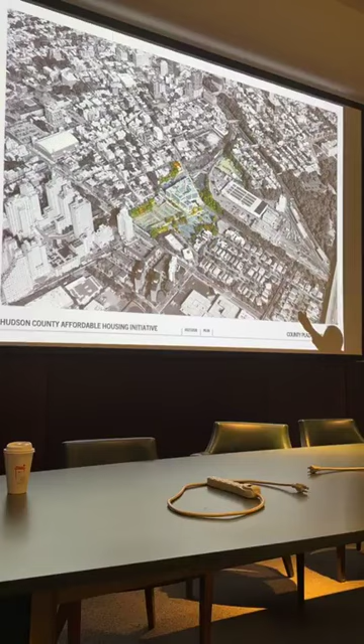And here we are - there's the beautiful picture our friends at Studio V put together where County Plaza is colored in. That's the land we're looking at, owned by the county and the Hudson County Improvement Authority. You can see the surrounding neighborhood - we've got all the residences to the east of County Plaza that some people call the Colony, and we've got the Beacon to the south, and so on.

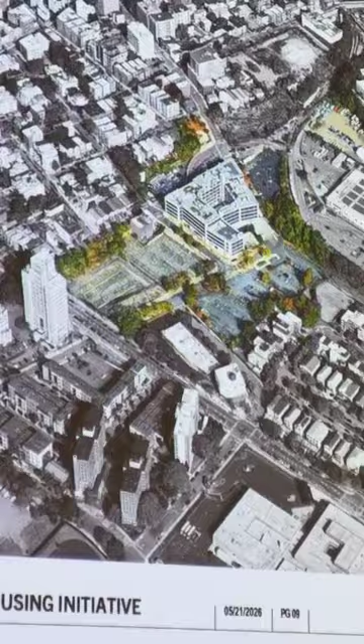Here's another map of it. You can see a lot of it is surface parking, and that is something we do have to deal with.

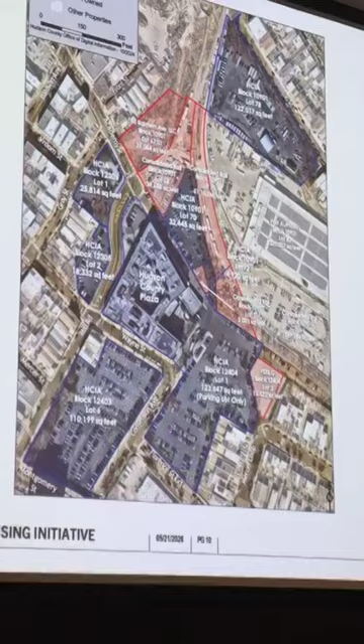This building isn't going anywhere. This building is an important building. We have about 1,000 employees that work inside of County Plaza, and they park in these parking lots that surround this building. They do a lot of important functions for the county, ranging from working on food stamps, welfare, Medicaid, the Board of Elections, the Department of Public Works, and so on.

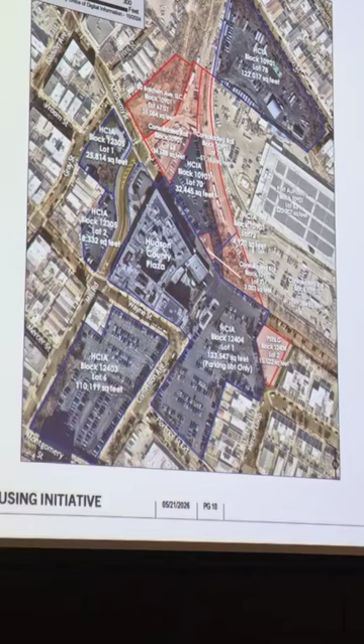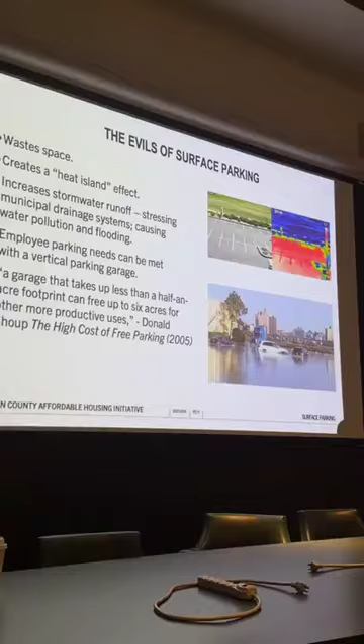The idea is that we don't need to have everyone who's parking here spread out like that. Really, surface parking is not a good use of land. Surface parking creates a lot of problems. It creates flooding, it creates a heat island effect that raises temperatures, and we know, as of yesterday and the day before, what that could be like.

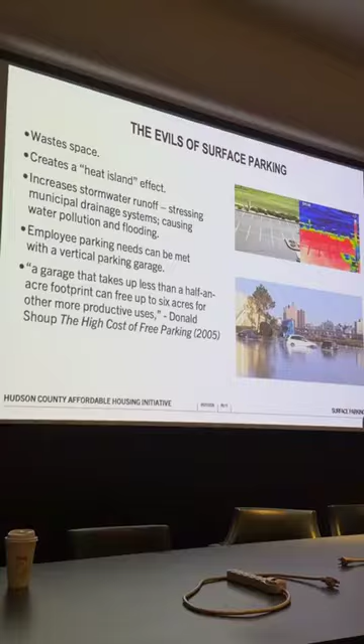So we can provide parking for the employees here on a fraction of the land by building something vertical for them, and at the same time dedicate so much other land to more productive uses like housing and green space. And one of the reasons we believe it's important to have mixed income here is multifold.

One is that when you have market rate rents mixed in with capped affordable housing, it provides you with the revenue to pay off the debt that it's going to cost to build these buildings. It's going to cost a lot of money. It's going to provide us with the adequate revenue to provide top service management for it.

When you have mixed income, you tend to provide for safer communities. You tend to draw in better amenities. And in the past, we've seen that when you've segregated people by income and tried to concentrate poverty into one building, it's a failure.

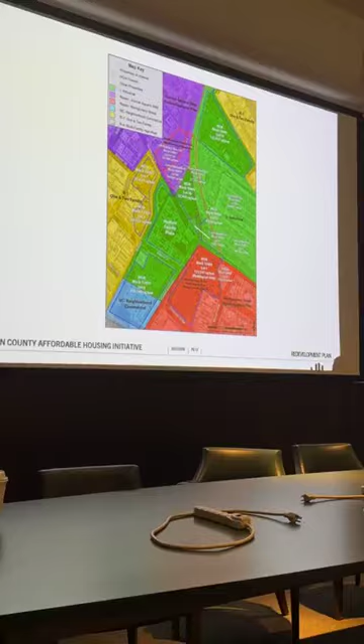One of the things we need to do in order to develop these parking lots into more productive uses is to change the zoning. This picture here shows you County Plaza, and all these colors indicate the type of zoning that governs. It's a mishmash of antiquated zoning that governs this area now. Some of it's industrial—there's not a lot of industrial building going on right now in this neighborhood.

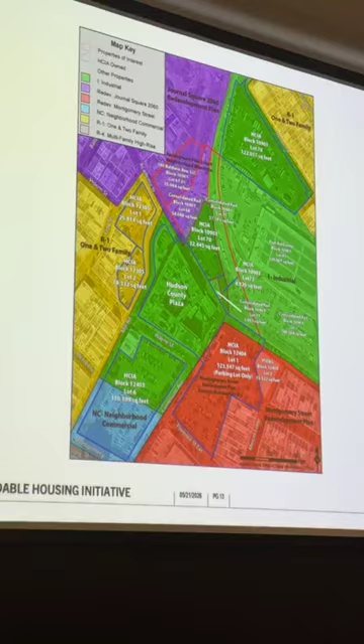Part of it over here is the Montgomery Street redevelopment plan that calls for 5-story buildings. We think that's antiquated. We think something more robust here preliminarily. But that's a redevelopment plan that was promulgated 50 years ago and by its own terms expired.

The Jersey City government agrees. In 2021, they promulgated a master plan for the city, and they identified this land as a piece of land that needs to be redeveloped and that should have a redevelopment plan. Because it's very obvious, I think, to anyone that when you look at this land, we could do something better than what we're doing with it right now.

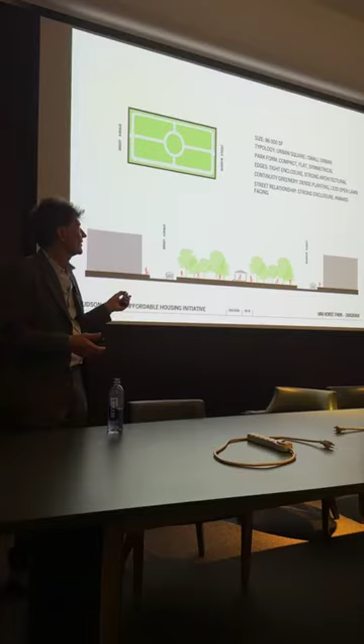For example, Van Vorst Park — this is the historic plan. We looked at what were some of the things in there. Why is that a nice place? How does it create greenery? What is the sense of enclosure? And how does it become a special place within a community? These are just examples, and I'll show you in a minute how they could apply.

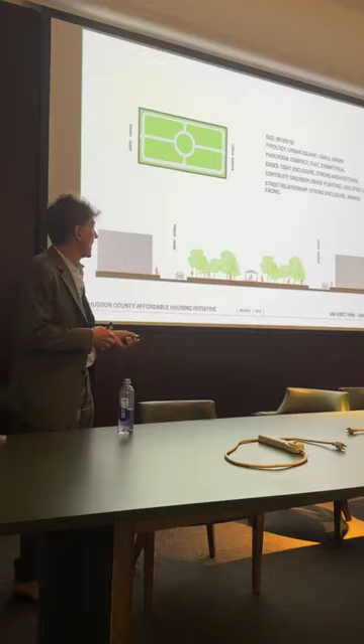Just as there's a plaza outside here, we were thinking maybe we could create one or two green squares that become a focal point. Because, as Bill said, we're not just trying to create housing — housing is the goal, but we want to create a community, a neighborhood. We need things that will actually create a sense of place within it.

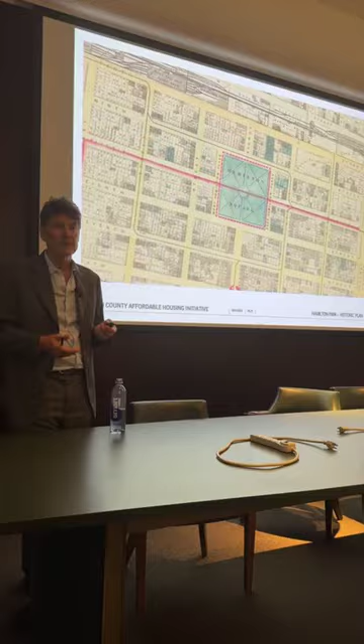Here's another one, Hamilton Park — you guys know this, another neighborhood here in Jersey City. It's different from this neighborhood, but it has this beautiful open green area, a central lawn and trees, some playgrounds and different components. So again, this becomes the center of a community.

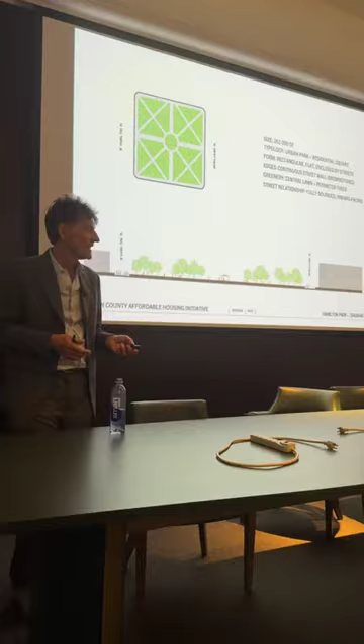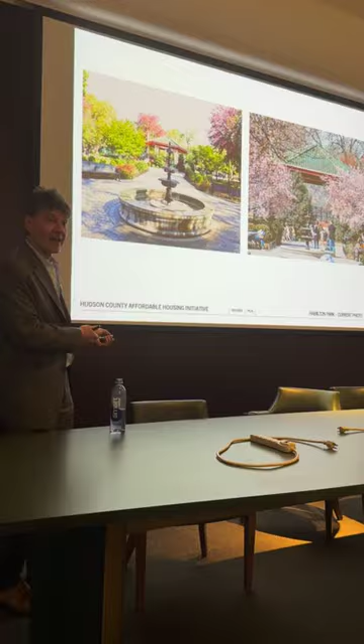We started looking at these — historic photos of it, as well as pictures of what it looks like today. It has different features. Later on, we're going to ask you what kind of features you'd like in residential buildings, retail, and open space, because we can start planning those things into the design we're just starting to work on. These are other examples.

This is Cira Green — a little unusual, but we asked, can you create open space on top of parking? Because we have a parking garage and a parking lot here, and we'll have to replace cars since people are still parking here. So we'll probably create garages wrapped with housing, put them below grade or wrapped with buildings so they're interior. But it's also possible to create beautiful open spaces integrated with infrastructure like parking.

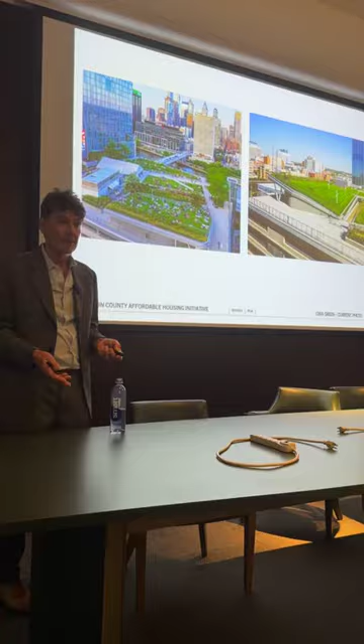So these are just some different examples. I thought this one was very pretty — it took advantage of grade changes.

It took advantage of putting the parking below. So this could be another solution.

You probably know our sites, you can see them right out there, very sloped. There's a lot of topography here. So you could have an area where you put parking below at one level, and then the neighborhood comes in a little bit higher. For example, where you have Mercer and Florence, they come in at two different elevations, like 20 feet, almost a two-story difference between the two. Or Montgomery, there are places where Cornelison goes under it, so there's a difference in elevation there. That's just part of what this neighborhood is like.

So we could actually kind of fold parking in underneath green space or wrapped around by housing. That's why we show some of these examples. I'm just going to show you some initial thoughts, and these are very, very early.

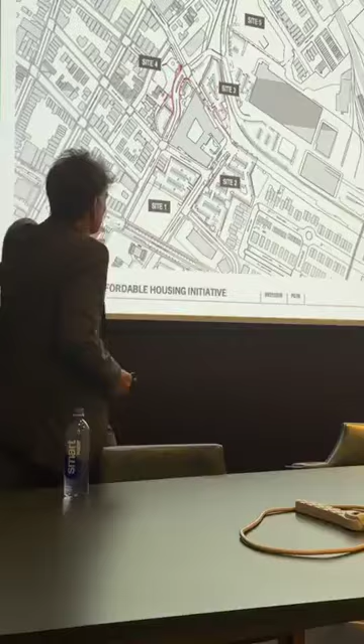But first, these are the sites, and the sites are all different. As Bill said, we're in the County Plaza building, so it's very convenient because we can actually feel right where we are. You guys know it's right here. It has this little plaza, so we're right in this space to kind of highlight it for you guys. And then these are the sites around it.

So to the south is Site 1, and that's the parking lot. That's over to the side, and that goes all the way over to Montgomery. That's like this huge parking lot that extends right to Montgomery. So it's a big surface lot.

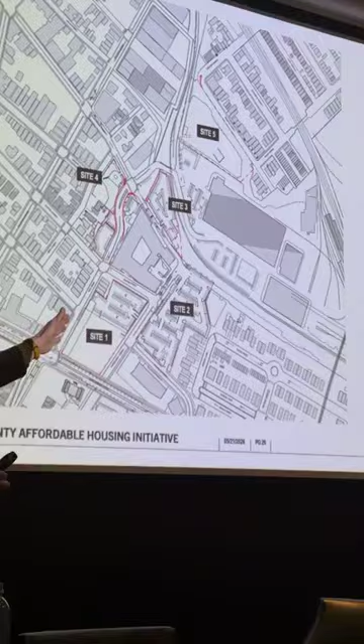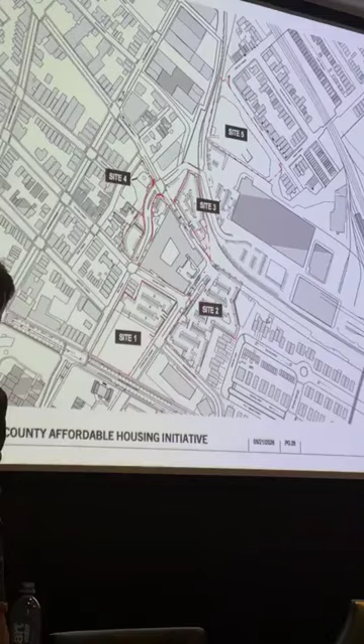Then you have Site 2, which is right across the street from us over here. This is also another parking lot, you can see it right there. There's a smaller kind of triangular Site 3. There's a little tighter site on the back, that's kind of up on the hill. There's a little park there, that's where the Palisades comes through, so there's a green area and a park there.

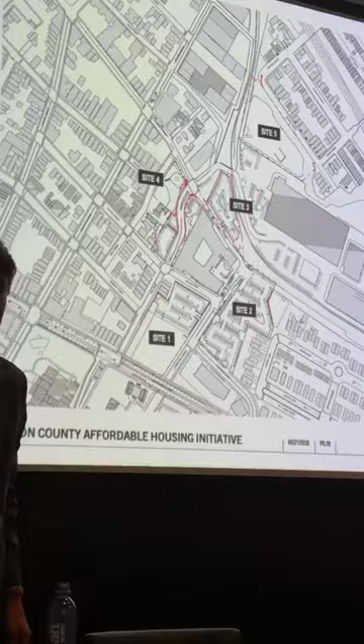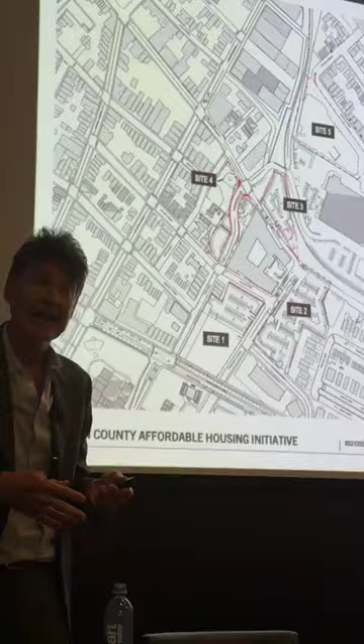And then one of the sites that's the hardest to figure out, I'll show it to you in 3D, is Site 5. That's up by that community some folks call the Island, where you have the trains from the PATH. It's kind of an industrial site, which is a little bit hard to get to, but the county owns that too. So we're trying to figure out, could we incorporate that into it, and could we create something there? That's also built into the hillside, like the hill comes up on top of it.

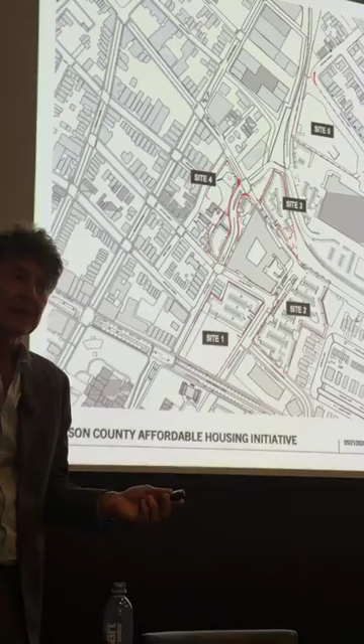So these are the 5 sites, and it's complicated. They all surround this building we're in. So we're thinking, how can we create a sense of place? I'm going to go back to those parks and images. And how can we create the housing, and how do we create the right scale of housing?

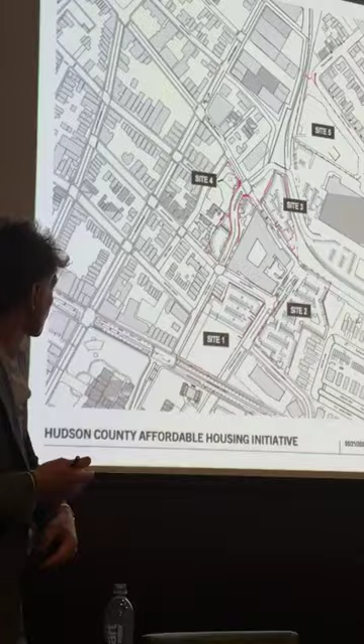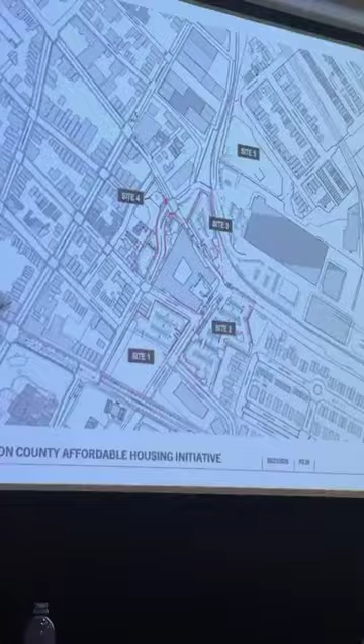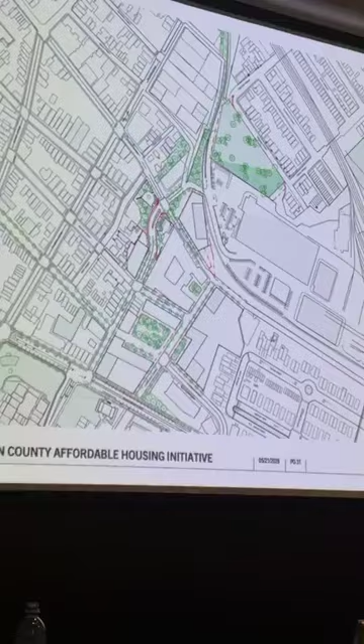Oops, let's see. Oh, and that's not, yep, oh, you got there. It just jumped ahead. Okay, so let me go back. I guess it's kind of lagging a little bit. Okay, all right, maybe I'll advance it manually, yeah, it looks like it's lagging. Better. Okay, let's see if I can get this to go.

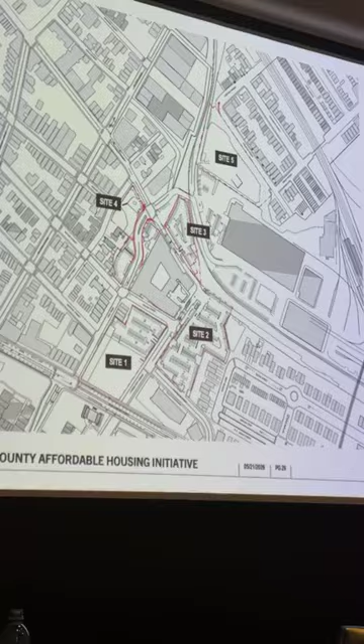So these are the sites. It's not moving? There, for some reason it's kind of jumping and lagging, but let me try to take you through it. So this is the first option, okay?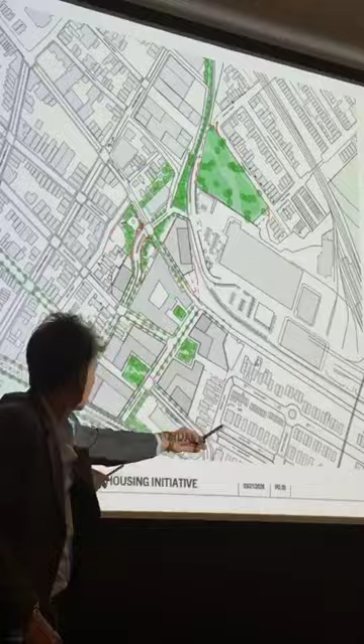In the first option, now you can start to see when I talk about these squares, it seems very abstract. But you can see down here, we thought, well, maybe where you have Mercer coming down, and Florence on the other side, this is the parking lot, but maybe we could create a little square there. So it extends with Mercer on this left side, like this, and then Florence is over here. There's a grade change here, like I was saying, and this could be one of our little town squares. So this is one example.

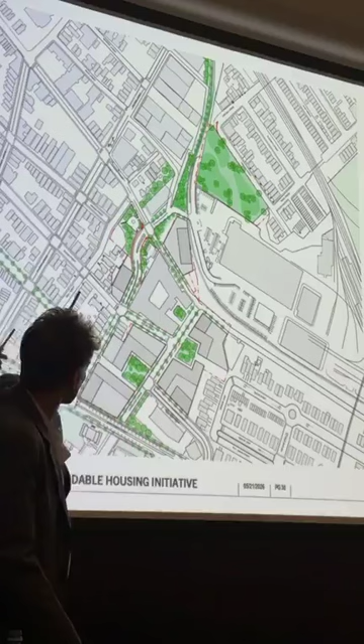We showed a second one over here at Wayne Street. That comes along the edge of the county building, and it ties into Wayne Street down here. It's a pedestrian link because the street doesn't extend there. So that could be a second green square.

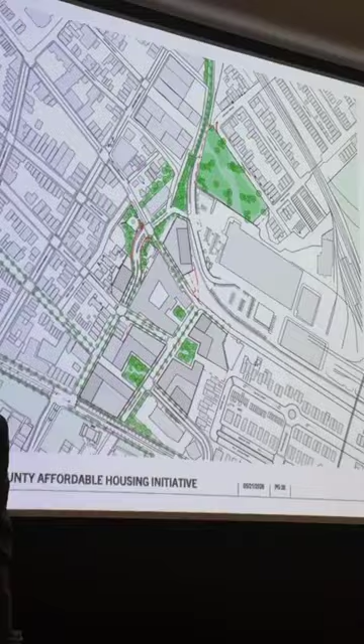And then the third one is really the plaza right here, which is that space right outside. But maybe we could open it up or take that fountain that maybe isn't being used, and create some way to kind of activate it. So these become three little green spaces, three kind of public spaces, open spaces for everybody.

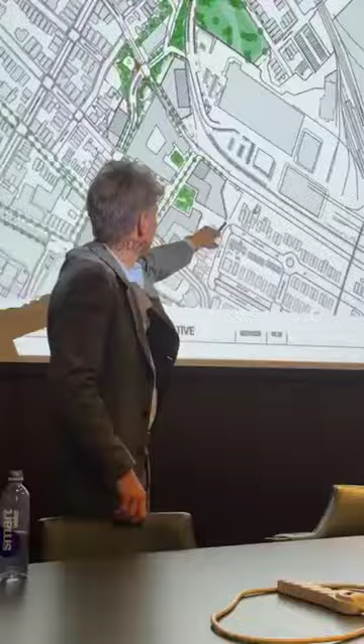And then we organize the buildings around them. We can do different scaled buildings here, and I'll show them in 3D so you can start to see how we could create housing around these open spaces. So this is just one sketch, one initial idea, and I'll show you how we could develop that further.

And then you can also see up above, I want to tie into that upper part that goes up towards Journal Square. That's kind of the Palisades, that green area where the hill comes out of the ground, and you see a bunch of that greenery. There's those parks over there.

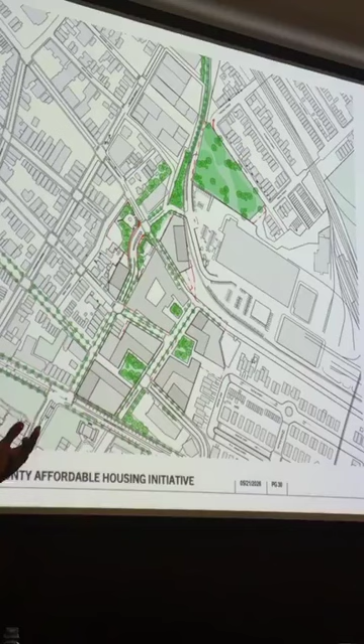So we thought maybe we could create a pedestrian walkway that goes all the way up into Journal Square. And there are other proposed developments further up, and we're thinking we could create extensions and walkways, and possibly even parking on that Site 5, built into the side of the hill, and maybe we could put a park on top of that. So these are some of our initial ideas.

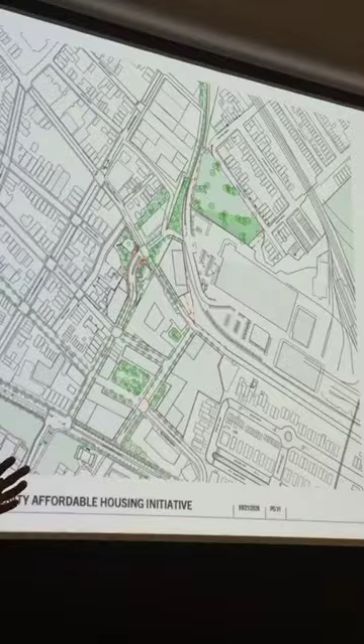So here's a second option, and again, these are sketches. Instead of a bunch of little squares, we thought maybe we do one bigger one. And that one's here. So we did that along the edge of Cornelison, right? And it actually still has Mercer coming into it here and extending through.

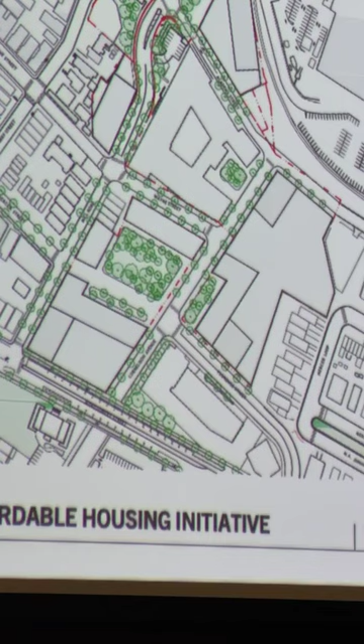And we created one larger square there that kind of organizes the whole site and creates one slightly bigger park instead of three smaller ones. So this is a second idea that we had, and we thought that one could be kind of cool.

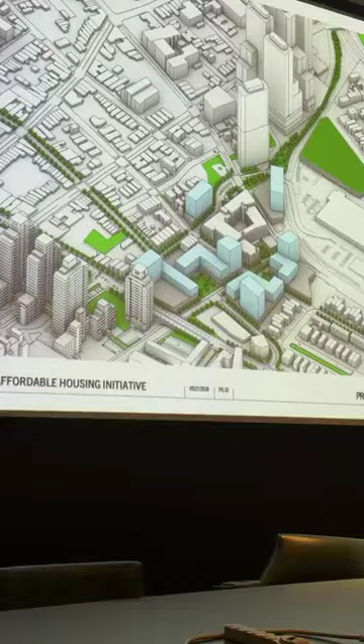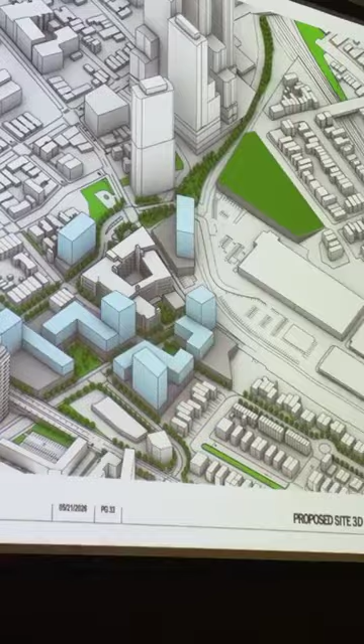So here's the different sites. Here's the first scheme, where you can see we're wrapping the little squares with it - like here is one, and here, and here. And we're wrapping it with pretty small scale buildings, but we can actually get a lot of housing in here. And then we did some smaller towers in between, and we could probably get about 700 units of housing in a whole series of different buildings and still have it be a very nice scale. And it's really smaller than a lot of the things around it.

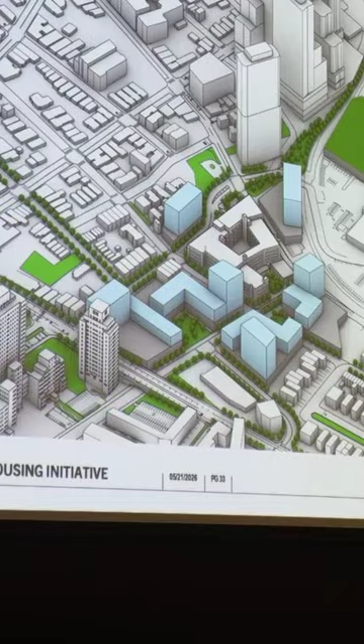We could also do a little more housing. We could increase the scale a little bit. So part of our goal is to do something that creates a real sense of place.

Here's option two. We show one bigger square. We keep the housing around that square pretty small, and I did a few other towers. Again, they're still smaller than the ones at the Beacon, and smaller than the ones at Journal Square. So this is a second option.

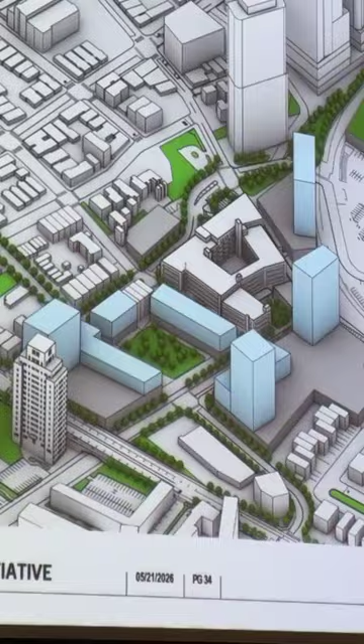So I'm just showing you some ideas. Again, we're not here to say there's one scheme, but I'm here more to show a way of thinking and ideas. And then I'd like to open it up for questions and so forth.

But to finish, I can show you kind of a larger timeline as to how we want to do this. And then frankly, I'd be happy to come down and talk to you. I'd be happy to take questions from the live feed and answer your questions.

And then I would encourage you to go over and look at the drawings that we put on the side. We would ask you to tell us your thoughts and take a look at it, or even make some decisions - we have stickers and things like that where you can choose what kind of features you'd like, what kind of public elements, what kind of retail, what kind of park activities and amenities. So this is our next step.

Of when we can hopefully start to see something going vertical out here.

So from a legal perspective, what we have to do is change that mishmash of zoning, and we're looking to promulgate what we're calling a redevelopment plan. The first step is we have to have the city declare that this is an area in need of redevelopment, because it's really not being utilized in the appropriate way.

The city's council has authorized that study to be taken, and it's underway. We're hoping that within a month or so, or during the summer at some point in time, the city will make that step and say it's an area in need of redevelopment.

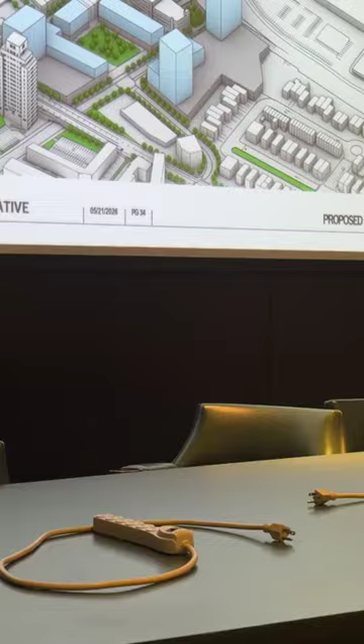What else? I have another question. I see the building, which I'm guessing. One thing, I'm sorry, I don't want to interrupt you, but if you could stand up and speak a little louder, folks in the live chat are asking.

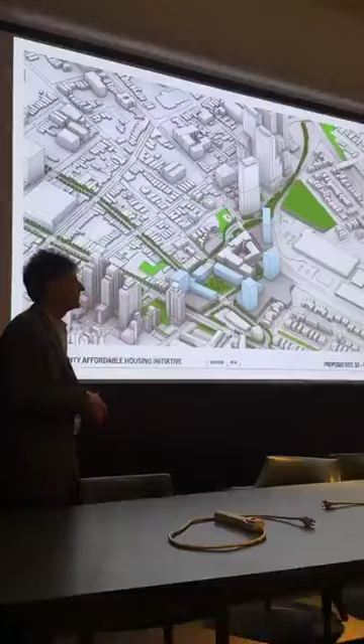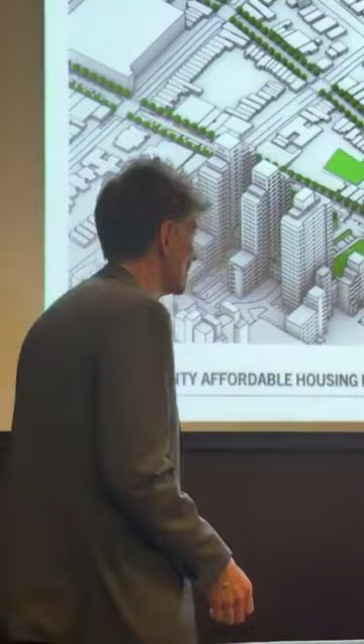So the question was, like, what's the difference between the gray and the blue? Actually, it really should be one color at this point. We're just showing the lower base, but really all of it is going to be wrapped with housing. So there will be parking in the base, which could be multiple levels of parking, organized and structured like I was saying, so it's much easier to find a space. But the goal is also not just to have parking garages facing the street, so we'd tend to wrap it. For example, on Montgomery, one of the most important streets in Jersey City, I'd love to see retail there.

I think it's very important to activate Montgomery—that's where you have some restaurants, a little bit of retail. So these are some of the questions we're going to be asking. What kind of retail would you like to see? Would you like to see restaurants? Would you like community facilities? Would you like a supermarket? Does the neighborhood need a supermarket?

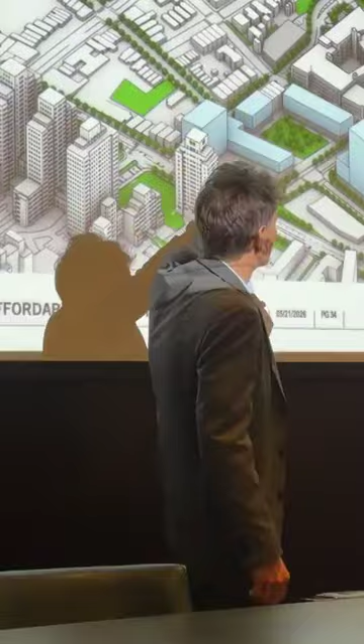So it could be, for example, retail on Montgomery. It could be housing on some of the bases in the lower parts, and it could also be other uses. I think it's very important that we activate all the edges and find the right way to be good neighbors, actually facing all the streets and engaging them, which is really important. It could also be, and I'm not sure, speaking to you as a restaurateur, we were debating—do we do a little bit of retail on the squares?

And it's tricky, because retail normally has to be near other retail. But restaurants and things like that are terrific for drawing people, and restaurants tend to feed on each other. When you have several restaurants together, it tends to attract more traffic for each restaurant, which is interesting—you tend to get 1 + 1 = 3.

So maybe it's possible there's some retail here, and maybe we try to get a little bit of restaurants or hospitality on these green spaces, because that really activates them and pulls people—might even pull people from Journal Square. So these are just some of the thoughts we have. When we go over into the interactive part, when you all get to say things, write things down, or put stickers, we hope you'll tell us what you think might make sense.

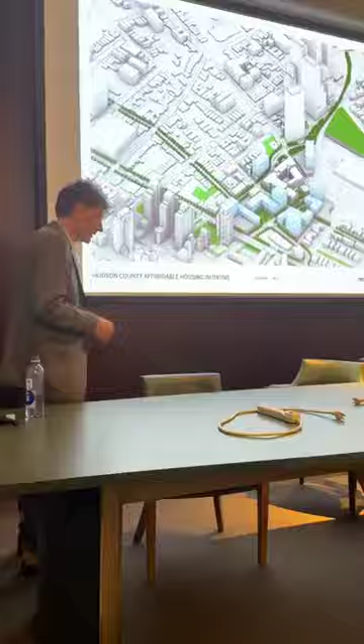You mean Section 2, down here? So the question was, the gentleman lives in Section 2, and he's saying there are children who don't have enough places to play. Could I just ask you, where is Section 2? Because I don't know it by that name. I think he means the Colony neighborhood over here, right? Yeah, that's also known as Section 2—I just didn't know that. So thank you. A lot of kids play there, but they have nowhere to play except the street, basically.

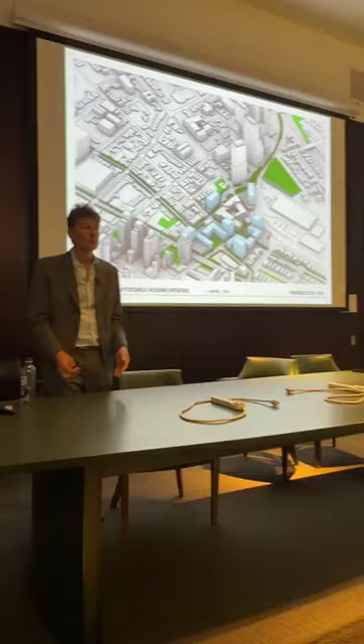Well, one thing we could do, if the community is interested, I would love to create a playground—playgrounds or sports facilities or whatever the community tells us, depending on what you think would be appropriate for different age children, different activities. And I can tell you, as an architect and planner, I have designed many playgrounds and open spaces, and it's one of the most fun things you could do.

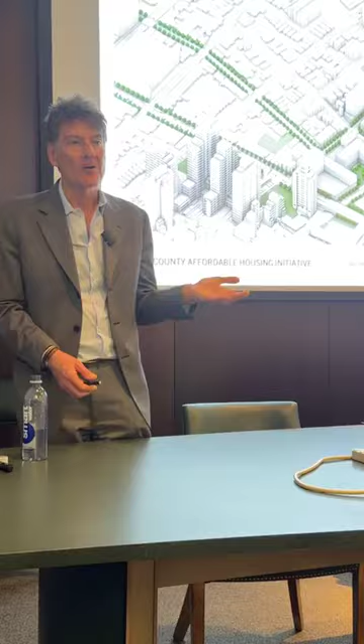By the way, I didn't introduce Kathy Chan, my partner, and Wo Wu, our senior designer. Wo just designed a 1-acre park we're doing right now in Queens, with a beautiful playground, and it's going under construction now. So I'd be very excited—if that's something the community is interested in, those are the kind of things we can do.

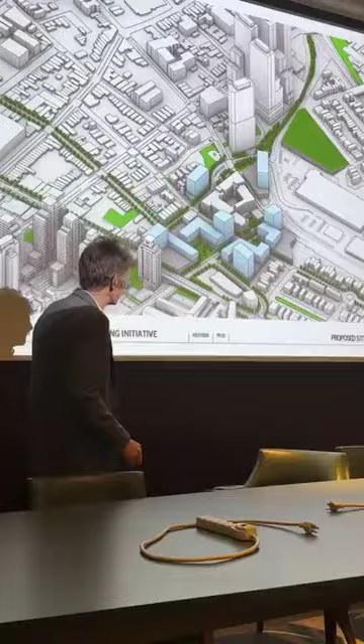Where would it be? Well, I'm thinking—and again, it's pretty early, we haven't really designed it yet, sir—but if we do these open spaces, like I started here, or that other one, we could definitely put a playground in there. If everyone felt that was appropriate, that would definitely be a good location, some space down there.

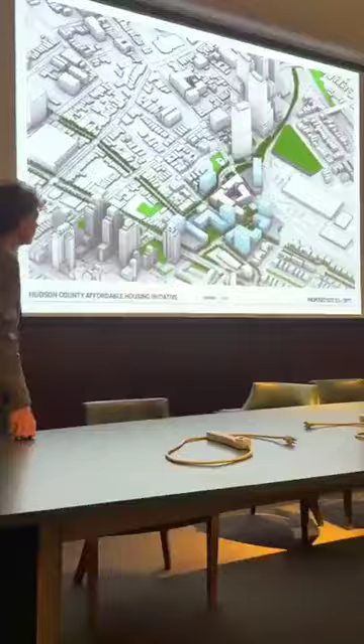I like this, it's interactive—this is how it should be. So that's interesting, a basketball court.

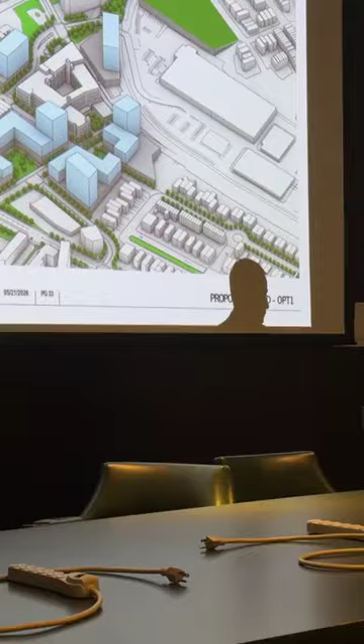So I think you're talking about the piece of land over here that's owned by PSE&G. Yes—and in fact, I was just talking to my law team today about drilling down on the status of that property, because maybe we can get that in the mix with my friends at PSE&G. And sir, were you thinking an extension of Wayne Street? Because that's Wayne Street where you were looking, right? So maybe we could extend that in.

What's that? Sorry. So that would be interesting. You're saying the kids are maybe playing on Wayne Street? I was trying to follow that, but I wanted to understand that. So maybe extending that into an open space and creating a play area, that could be a great idea. Thank you for sharing that with us and coming up.

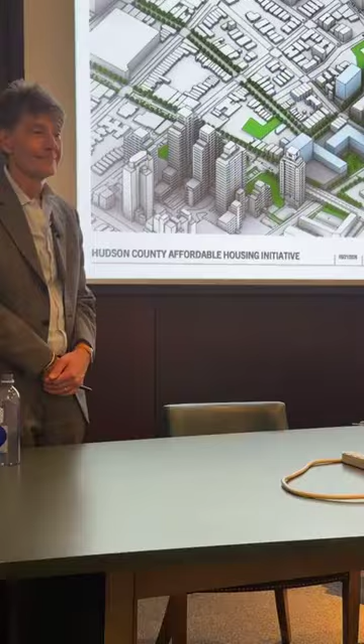Yes. Can I ask you to stand?

Congestion, the traffic is horrible. After a certain time, the traffic is horrendous. So you're inviting more traffic, cars. What about public transportation?

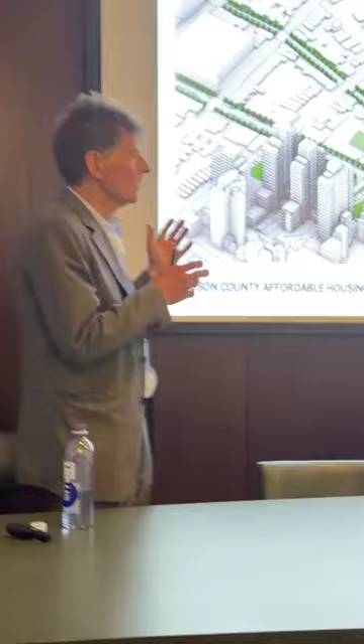So congestion is an interesting point. What we find is when you actually create more mixed communities, where you have working spaces and housing spaces, it can actually help with congestion, not create it. When you create more pedestrian-oriented communities where it's easier to walk between different things, to walk to restaurants and shops, it cuts down on congestion. Now, it's not going to solve congestion or traffic completely.

I don't think it will. But if we design the parking in the right ways, with the right entrances and exits, and if we create more housing, it's actually even proven that when you have housing and commercial space next to each other, the cars tend to use them, parking spaces tend to be occupied, and the congestion tends to be at different times. Residential neighborhoods are busy at certain times, and commercial or community facilities like this are busy at opposite times, weekdays versus weekends, daytime versus evenings or early morning. So it can actually help with congestion, but you have to plan it properly and look at it carefully.

And we're hoping if we strike the right balance, it really won't hurt. Now, Montgomery Street or some of the other major arterials, I guess that's your question. Part of that, too, is we have to do environmental studies as part of it. We look carefully at timing of signals, and work with the city to figure out how you get the best progressional flow of traffic. There's a lot of thinking that has to go into a master plan, so we're going to try to take those things into account. But hopefully a balanced neighborhood and a walkable community really helps address that, too.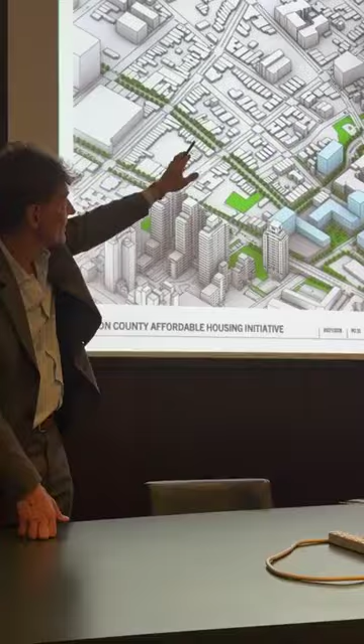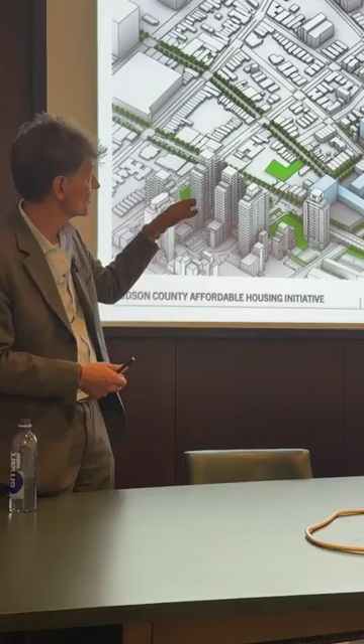That's one of our ideas, and I personally kind of like that idea. You can see this sort of green path. Now, we don't control the whole thing. For example, you see some towers at the top of the drawing, and that's not us. But that's a scheme we know about, and it's actually going through a public process right now, being discussed. We happen to know the people, because they shared their plans with us, to create a pedestrian walkway there. And we would strongly encourage that.

So we were thinking that we would create connections. For example, on Mill Street, or even up by Academy there. Creating additional connections that allow you to walk up into Journal Square, we thought would be helpful. So we're definitely supportive of that if people like it.

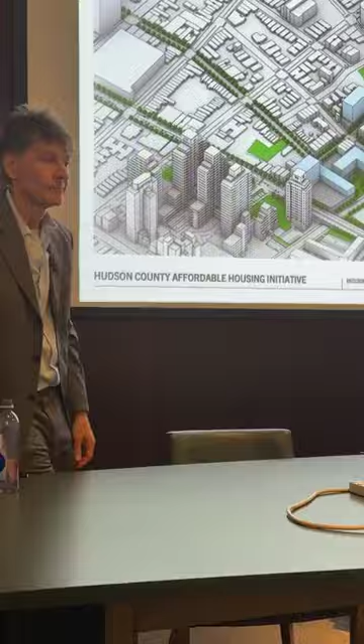Councilwoman Little, yes. I would actually love that idea, and I would also advocate for it to be a multi-use path, and maybe even put a Citi Bike station at this site, because it's a bit of a hike to Journal Square. So if you're commuting and the weather's nice, you may want to sleep in that extra 15 minutes and just take a bike instead. If we could make it a multi-use path, I think that'd be even better. Because this is kind of in the area where it's a hike to Journal Square, a hike to downtown. You're technically walkable to both, but you're talking 20 minutes.

So, yeah, I love that idea. I think that's a great suggestion. So when we plan it, and our folks are taking notes, we can create walkways. I'm an avid cyclist myself, really into it. And you want to be careful because you want to separate pedestrians and cyclists, yet have them go along similar paths. So we can look into that in the planning of it. We really appreciate the suggestion.

I also wanted to add - I'm sorry, the lady before asked about mass transit too, and I didn't answer that, so I apologize. I can't speak for mass transit because the city will determine that. But I can tell you that we've had a lot of luck in other projects and master plans I've done, where we've built thousands of units of housing. A lot of times we can create something like a square or a street, and use it to attract new mass transit, including changing bus routes, and that can really help too.

I meant to mention that before, so I can't promise that - I don't dictate how the Jersey City bus system works, although your elected officials can also help us with that, which is a great benefit. But a lot of times if we design the space right, and even design it so it has laybys for buses and bus stops, they'll accommodate us. Once we start to create more of a community here instead of an empty parking lot, we usually find we can get a new bus route in and improve public transit. I just wanted to add that since I realized I forgot to answer your question.

There's a significant grade change here where Mercer comes into Florence - about a 20-foot grade change there. We haven't really developed it yet, but we were thinking that could help put parking underneath. First of all, the site's accessible from both sides because the public streets are on two different levels, so we can make it accessible. Second, when we create parks and things like that, we'd definitely want to create accessible paths to it too - there probably would be elevators and things like that to tie into it.

Frankly, since we haven't designed it yet, we could step that in gentle ways - there are beautiful examples of that. We could even use the topography a little bit to really create a unique park and sense of place. So we have some work to do on that - we haven't figured it all out yet, but we see that as an opportunity to do something that could be really nice. Universal accessibility in public spaces is very important to us, and we'll definitely take that into account in all of our designs.

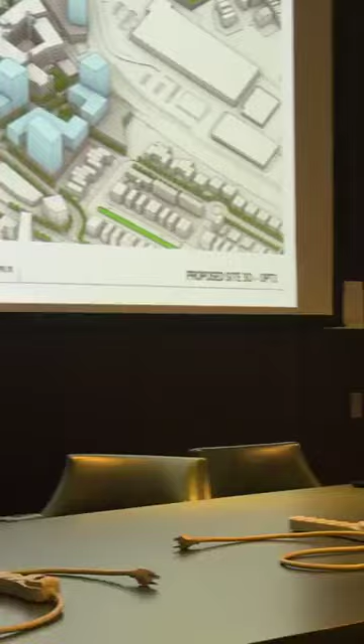I have two more questions from the chat, both from I Am Queen Bee. First one: what is the projected cost, and where will the revenue go from the rentals? And will this be a burden on the taxpayers?

We don't have an exact cost right now, but it's not going to be an inexpensive endeavor. Anytime you're building housing of this type of magnitude with these amenities and open space, it's going to be expensive, within the hundreds of millions of dollars. But we're looking at a couple different places where we think we can obtain assistance - we have federal funding applications underway, other grants we believe we can leverage, and we're hoping to get assistance in the form of tax credits to help facilitate this.

At the end of the day, some of the financing will certainly come from county bonding. The county has earned a strong bond rating, so when we borrow money in that capacity, the interest is something we can withstand and bear. But unlike most public bonding endeavors, like for schools or parks, you don't get any revenue back after you build a school - you actually give more revenue because you have to pay for teachers and programming.